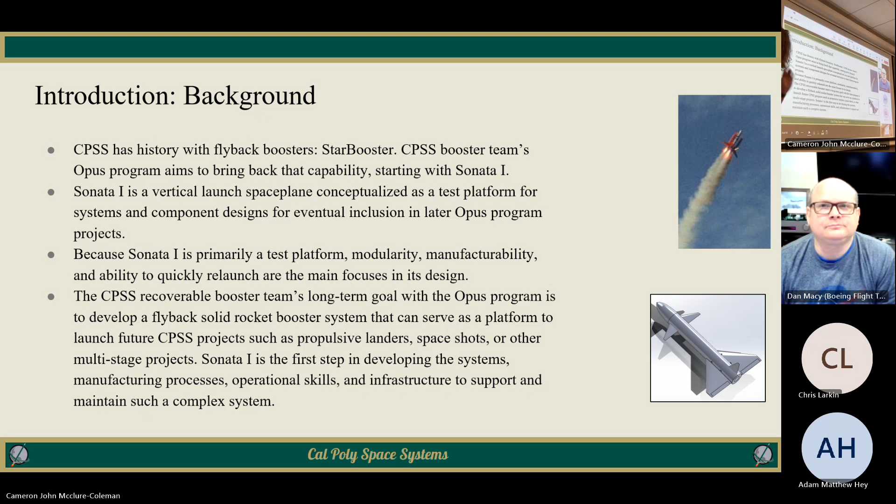Because it's primarily a test platform, we've been designing with modularity, manufacturability, and the ability to quickly relaunch and iterate as our main focuses. Our long-term goal is to develop a platform that could use flyback solid rocket boosters to get central stages up for projects like propulsive landers or space shots, or other multi-stage projects for CPSS in the future. So yeah, that's the background.

A little more detail on our rationale: we've decided to design to the constraints of having it be a small unmanned aircraft system, as well as the constraints of being a Class 1 amateur rocket. This reduces the headache of being reliant on organizations that run launch sites or other competitions like we do with our other rockets, and lets us independently manage and schedule launches as an organization ourselves.

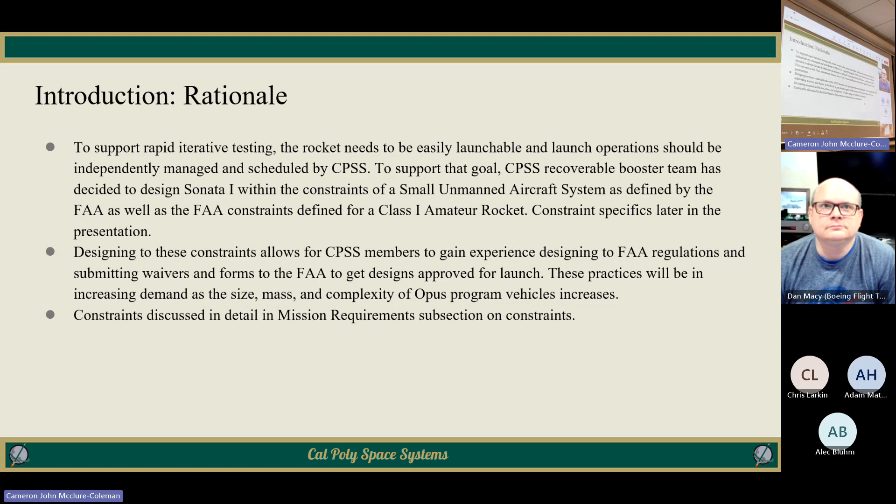Being a Class 1 amateur rocket, we'd still like to go through the proper channels and get waivers sent into the FAA, and have all the paperwork done that you need for a small unmanned aircraft system, because we'd like to practice that, and because safety is important. We'll need those skills for future bigger launches. I'll discuss the constraints further in the mission requirements subsection, but that's the overview of our rationale for how we're designing it.

Yeah, so mostly not too crazy stuff. We're also taking into consideration some other constraints we've been building with in mind. There are some severe airspace constraints we have to deal with launching in the San Luis Obispo area due to the airport.

And then also making sure that we're not launching somewhere where we could start a fire in a field with a lot of brush, and making sure there's nobody who could be in the way or in the range of operations, and that we have spaces for everybody who needs to be there to be safe and behind cover.

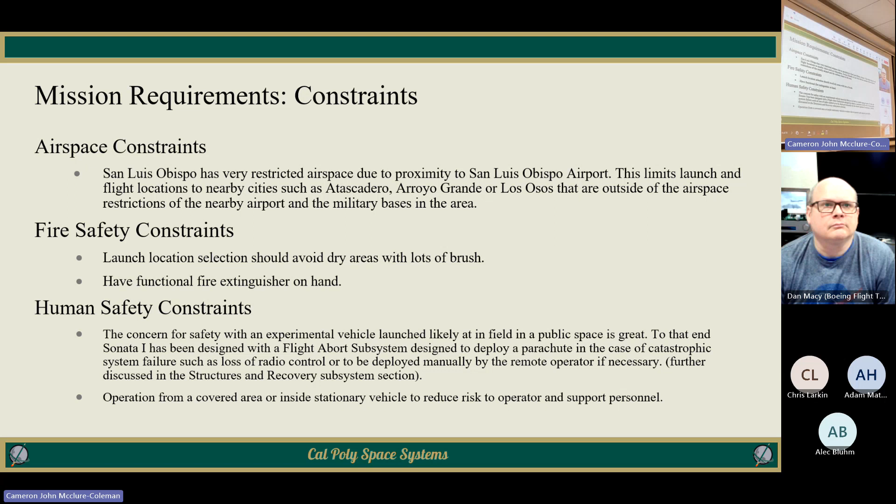All right, and then the mission objectives we've written up here, our main success criteria: we want to get up to an apogee over 250 feet and under 400, because that's what we're capped at for a drone unmanned aircraft system. We want a relatively straight up ascent, and then land after a successful glide phase. For the first flight, we don't want to deploy the FAS.

We're going to do other flights where we can test it. And then secondary objectives: gather data necessary to tune all the flight software parameters, and be able to rapidly test different designs for airfoils or whatnot. Gathering data on the performance of our physical components from the telemetry is important.

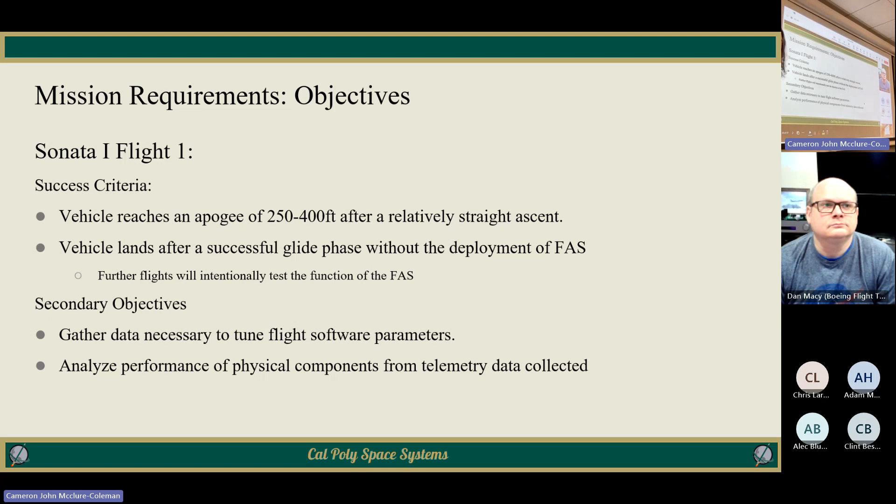And then moving on to vehicle overview. So this is just kind of our mock-up diagram here, and we'll go into further component detail later. But we're planning on building with large wings in the back, and then 2 canards with pitch control flaps.

This is very similar to how Starbooster was built. And we figured we'd just start with something that we know works, and then make it modular and rapidly relaunchable so we can iterate and test and tweak how we like it.

This is kind of how we're organizing the payload systems, with the motor in the back, and then the flight abort system that will deploy a parachute downward. We can talk about this further in the section on the flight abort system, but we decided to go this way because we figured it'd be pretty hard to fit it in a way that could come out the back, which would probably be the easiest for the parachute deployment.

But for manufacturability, we figured a spring-loaded system deploying downward would be the easiest to do, and also the safest, because we're not sure how the motor will affect a parachute system while it's burning out and getting hot.

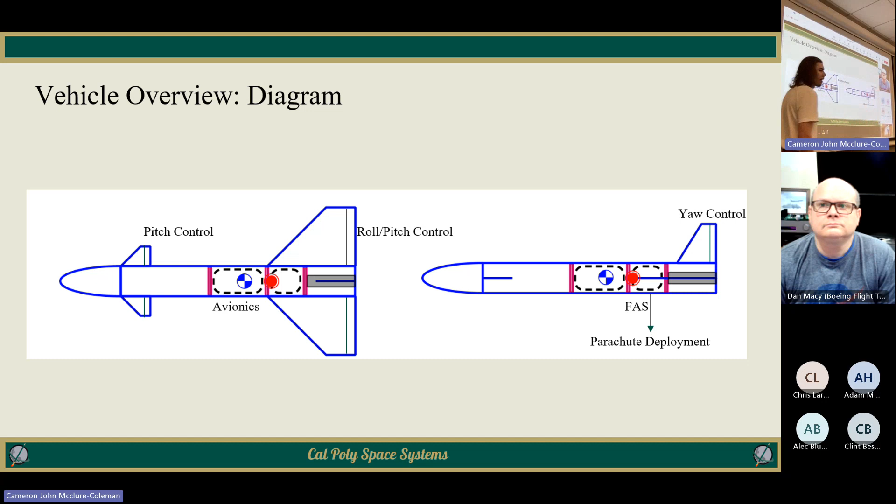Okay, and then just some quick overviews of the different modes of operation. While we're in ascent mode, we want the flight software configured to maintain a stable trajectory for us. Then after burnout, the vehicle will transition into the glide phase, where we'll have the remote operator take control of the control surfaces.

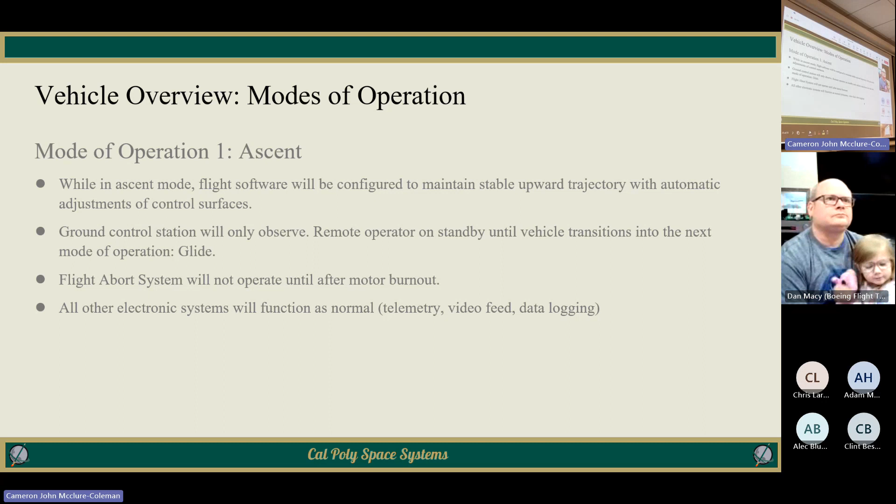The flight abort system, we don't want that to trigger while we're under motor power, so that will be switched into an off state on ascent. And then all other electronic systems will function normally: telemetry, data logging, video feed, etc.

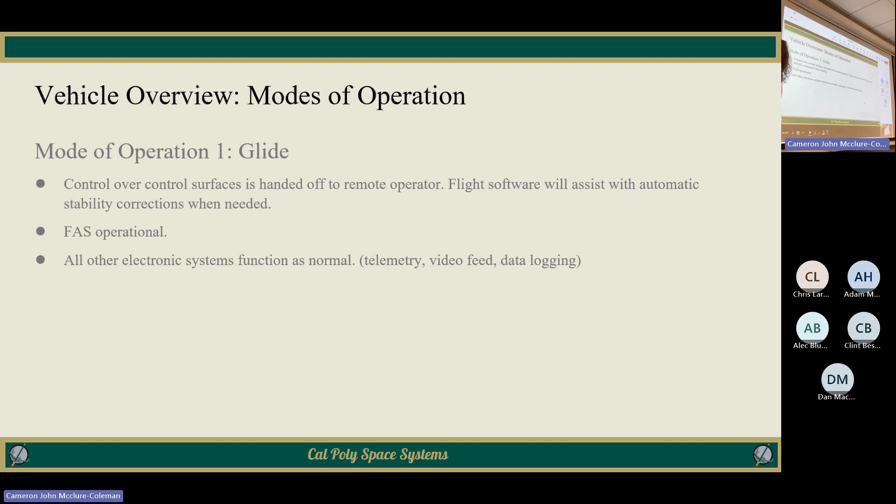And then in the second mode of operation, after we transition, control will be handed over to the remote operator, and the flight software will assist with stability corrections when needed. We'll have the FAS on standby, ready to go if we lose control or decide to manually abort, with all other electronic systems functioning as they were.

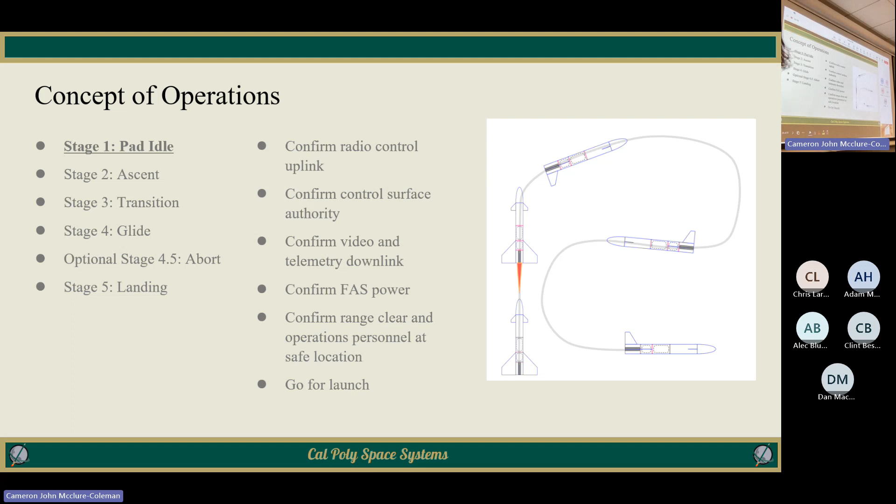So in the first stage, we're just on pad idle. We confirm all of the radio control uplink and downlink for telemetry, and then confirm that we have all the authority on our control surfaces that we want. Confirm we have power to FAS, confirm range is clear, operations personnel at safe location, and then go for launch. And then we can do launch and ascent phase.

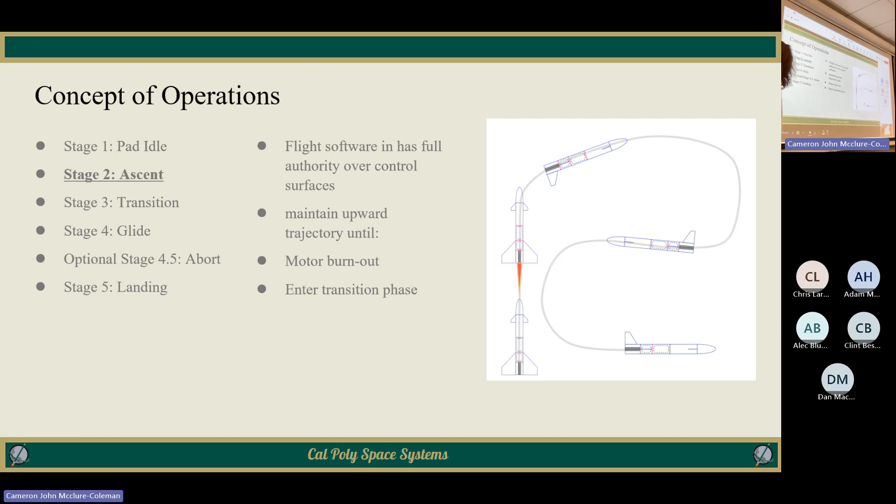Flight software has full control and authority over control surfaces. We maintain upward trajectory until motor burnout, and then at that point we go into the transition phase.

So we'll now be under remote operator control. Flight software provides stability support, and then we perform the peel and roll maneuver, peeling back, rolling over, and enter the glide phase.

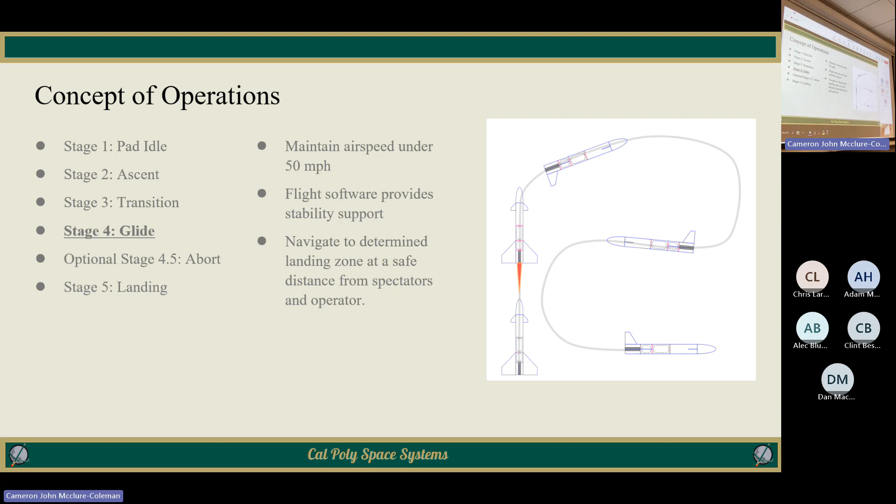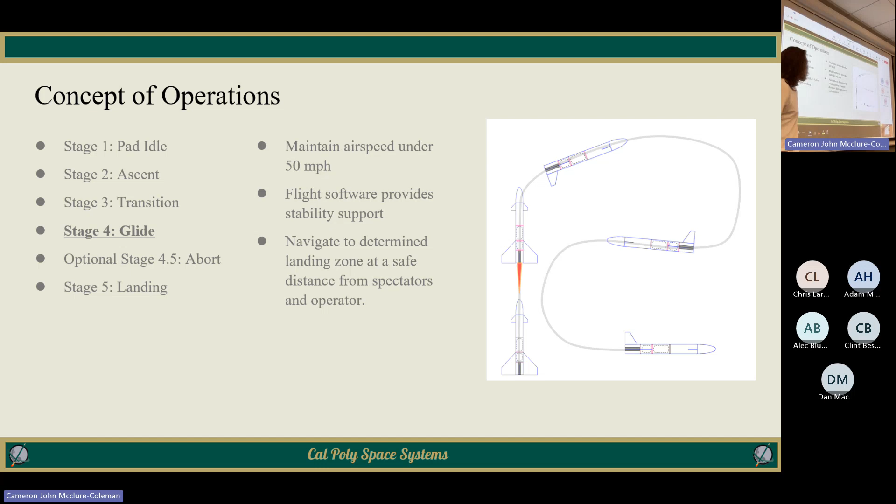During the glide phase, the main goal is to just keep it in a controlled glide, somewhat slow, not going ballistic. Flight software is now providing stability support as before, and then we want to navigate safely to the landing zone that we have determined.

And then here, if the FAS deploys, we'll have a parachute, and it will slow the descent and make sure that it's on a predictable descent and not just kind of gliding out of our control into a tree or into a person. And then if the FAS deploys, we want the control surfaces to stop operating, so there's no chance that they get damaged or they damage the parachute.

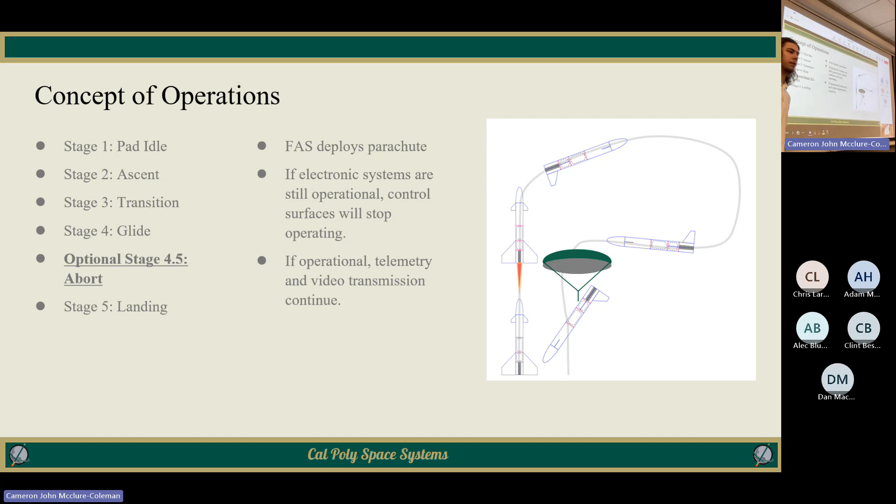And then if the telemetry and video transmission are operational, we'll continue just so that we have data from the GPS as to where the vehicle is, so we can go find it if it's too far. And then landing, power down, recover.

Yay. All right, I think we have some questions. It's Chris and then Miles. Yes, let's do questions.

First, what Mach number do you guys expect to be at the end of boost phase or ascent phase? Like 0.1 Mach, I think at max. I think if I can pull up Open Rocket, it's in the slides later, but it was no more than 100 feet per second, and motor burnout happens like a second or two into flight, 2 seconds.

Copy. And then, your flight abort isn't really an abort so much as it's just deploy the parachute, right? You would not stop your ascent. Okay, copy.

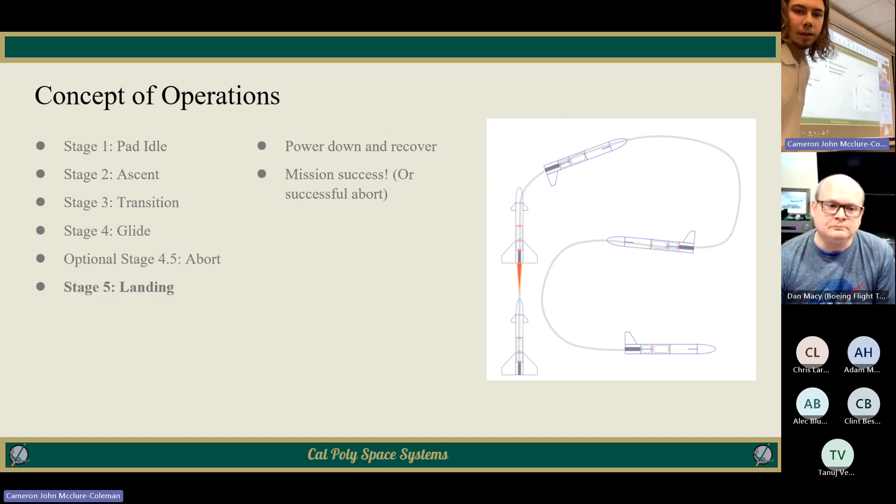Have you guys looked into ITAR requirements for active control? This looks pretty missile-y if I look at slide 12. I just want to make sure that you guys are appropriately accounting for that. Yeah, we've been reading through what the requirements are for fixed wing drones and stuff from the FAA. We read through that whole document, I think it's linked here. But ITAR is a good one to look at too.

I don't think we looked through that document on what classifies as a missile. We've just been going with what the FAA says you should do if you are flying a fixed wing drone, and are trying to design to those constraints. But yeah, ITAR is a good one to look into. We'll put that in our notes.

Yeah, I do not think that will fully cover you for fixed wing drones, since you are not under power from a propeller or anything. Oh, you think because it's under a rocket motor that... Sure, yeah. Okay, I think that might complicate things quite a bit.

Sure. I also wanted to reach out to them, they have a place on the website to reach out about questions about waivers and what forms we should sign. So I wanted to reach out to whoever the coordinator was for the local air traffic person from the FAA and make sure that we're doing it through the right channels. So that's somebody we can probably ask whether or not this classifies as an unmanned aircraft system or a missile.

Yeah, and then I guess if you are going to talk about this later, you can tell me to hold my horses. For the flight abort system, do you guys use a drogue chute? And have you guys considered using a mortar style, where you have a propulsive blast that shoots out the parachute instead of a spring-loaded mechanism?

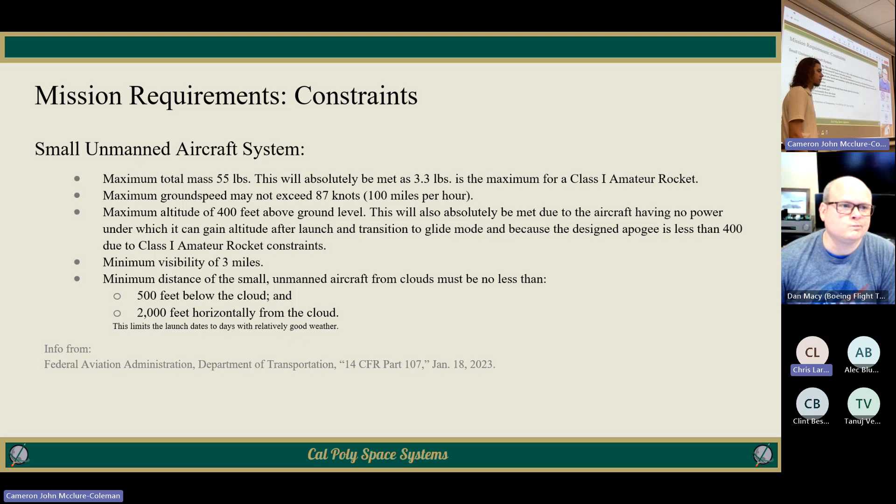What if your parachute deploy fails? Then you just limp mode the rest of the flight?

Sure, that's a fair concern. I guess we were thinking the main reason we'd be deploying the parachute would be that it automatically deployed because we have no power. But in the case that we still have power and the parachute gets cut, returning power to the control systems is probably essential.

You can add that to the notes.

Anybody else have questions before we move on to subsystems? I was wondering what your schedule looks like, not only for this project but scaling up in the future. Sure. We are looking to, in spring quarter, do first launch, and hopefully mid-spring quarter we'll have the option to do another launch day if we want.

And we're still in the process of selecting the best place, because there are a lot of variables there. Once we select where we want to launch, I think we'll have a better idea of when we can, and what the best target date looks like. Also, it's weather dependent as always with rocket launches and stuff. But we'll have more info on that for CDR, and hopefully have a specific schedule.

In terms of scaling up next year, we'd like to try launching a strap-on configuration with a dummy central stage, and that'll be our goal for the end of next year. Beyond that, scaling to whatever we need for any sort of projects will have to involve communication with other projects and where they are, and other payloads that are going to be developed, because I don't know if there's a specific one in mind yet for what we need to constrain to for developing a bigger version of Sonata 1. But that's like 3 years from now is the goal, I guess, so I'm not going to be here when that happens.

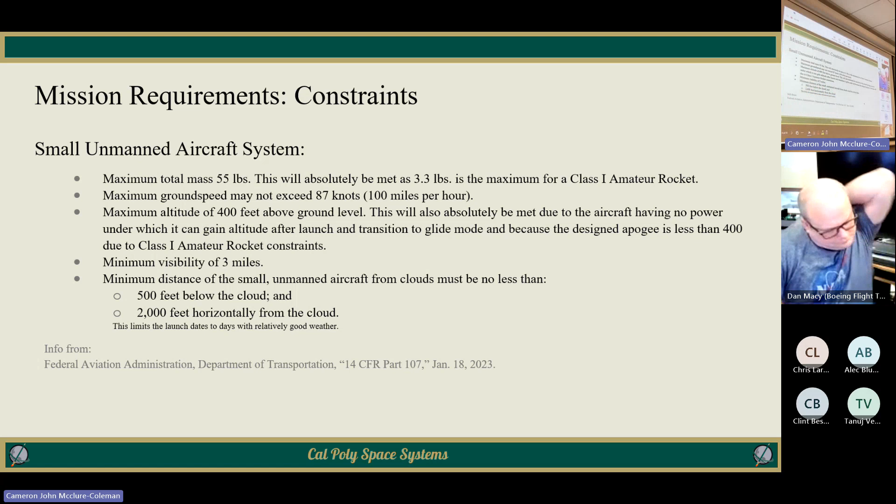You can also set that for power loss to the board, though you still have to have power from the battery. So there's also parameters you can set for a certain voltage threshold, so if you're low on voltage it'll pop the parachute before you fully run out of battery. There's a bunch of different contingencies you can set and have in place.

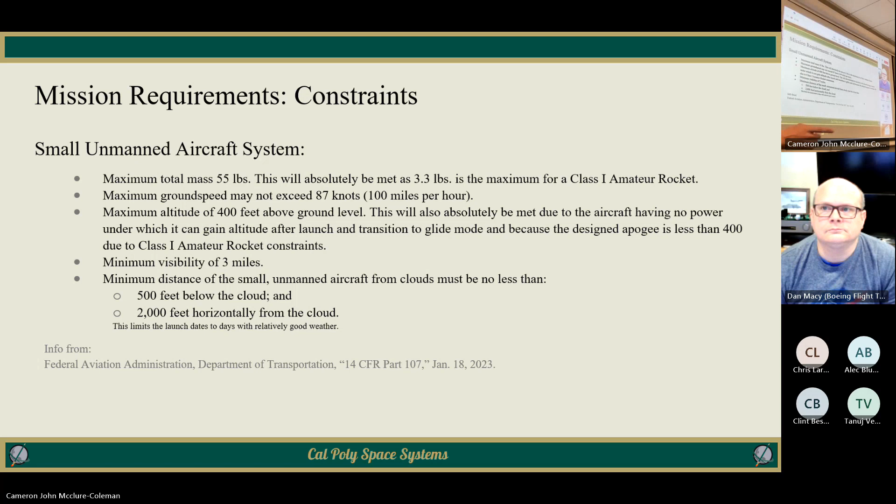Any other questions on the front half before we go to subsystems?

All right, we're good. Here's a quick agenda. We're going to go with lift and control surfaces first. I'll let Kyler take over for that.

Okay, hello, I'm Kyler. I did all the lift and control stuff. You just click next or... Yeah, you can do the arrow or space. Okay.

But basically, from what I could assume, I estimated the coefficient of lift to be between 0.15 and 0.3. This is just using estimated speed, because there's a video of it landing, and then the final report has a weight for it, and the rest can just be done using the lift equation.

So we basically decided to keep with a similar design as the old booster, using the same sort of delta wing with canard design. I guess Cameron already talked about this. And then we decided on symmetric airfoils, because that'd be the easiest for launch, so that there's no tendency for it to pull away when going straight up.

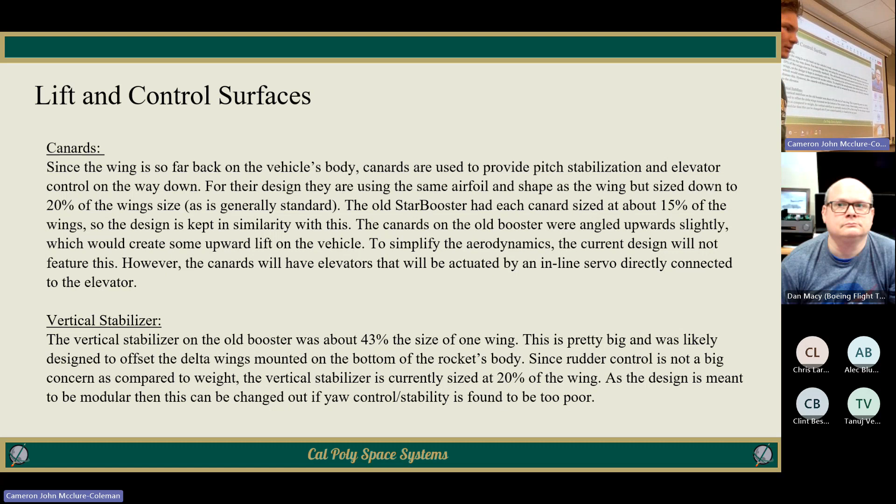And then I've already mentioned this, but the ailerons in the old Starbooster are about 12% of the size of the wing. And since we're making it pretty modular, we can test this and change them out. But for the start, I think we're just going to use the same ratios.

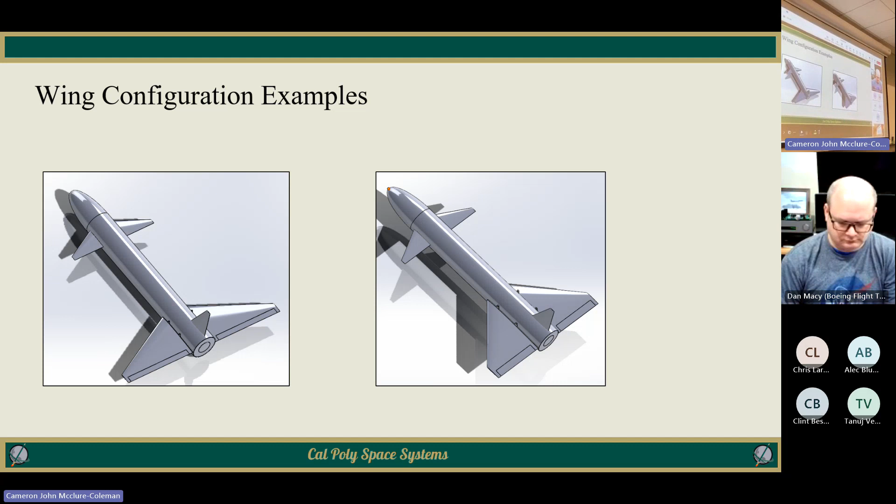And then we're going to control it with one of these low profile servos. We were going to put the servo in line with the control surfaces to make it simpler, but we decided that it would be better to have them placed up in the body and controlled down with a rod like most RC planes do. So that way we can switch out the wings a lot easier.

And then we also are going to test, ArduPilot has a built-in active control system, so during launch it can help stabilize itself, and we're also going to test that. We might not use that the whole time, but that is the plan.

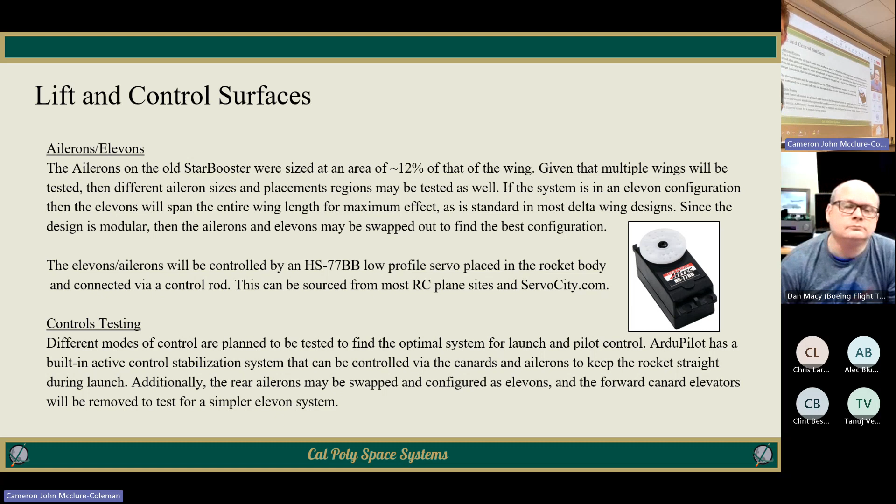And then for testing, the general goals are to determine the ideal airfoil and delta wing configuration for performance and optimal apogee. Again, testing control surface sizing and the system, so if we're going to use elevons only or elevators and ailerons, and then mixing it with the active control system.

Also for testing, make sure that the FAS works properly. That's supposed to be system, sorry. To assess that it works if we trigger it intentionally or if there's just a loss of control or power. And then we haven't gotten to this yet, but there is going to be a camera in the nose cone, and we're going to have the pilot control that with an FPV view. So we're going to test that and tune it to make sure it works properly.

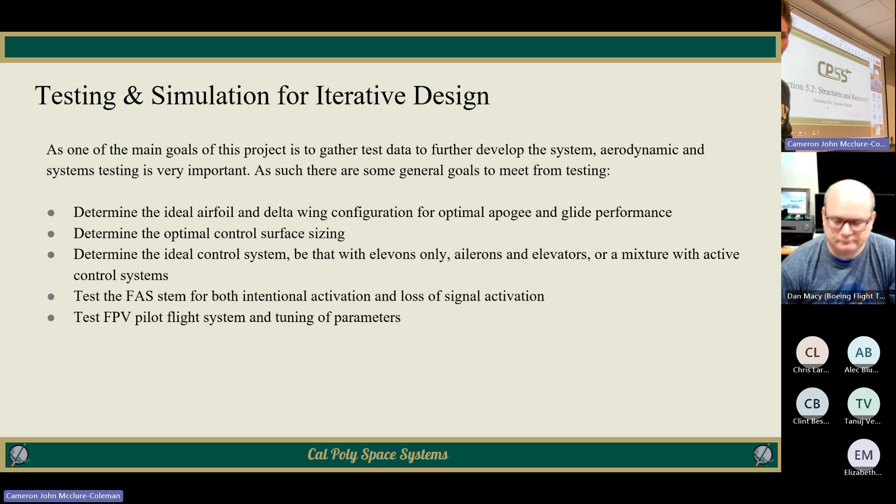I think that, yeah, that's the end of the lift slides. Any questions? Thank you. Okay. Any questions? On to the structures. Yeah, that's done.

All right, so my name's Spencer. I'll be doing structures and recovery systems. First off, just go over general dimensions of the rocket. For the main body tube, which is the main section, it's only going to be one section of body tube, 61.1 centimeters, which is roughly 23 inches. With a 3-inch inner diameter and just over that for our outer diameter.

We are going to be making it out of phenolic tubing, which is basically a cardboard tube that's resin impregnated. It'll hold up a lot better than traditional cardboard tubing will. It should have a compression strength around 5 times that of normal tubing. It's also heat resistant and only minimally more expensive than a traditional cardboard tube that you would use on smaller projects.

So we decided to use this because we have the motor inside the tube, and unlike a traditional rocket system where you might eject your motor, we are keeping it in. So the heat might become a factor that we're considering in the exhaust or in the back part of the rocket. So we just want to make sure that we're not burning up while we're gliding.

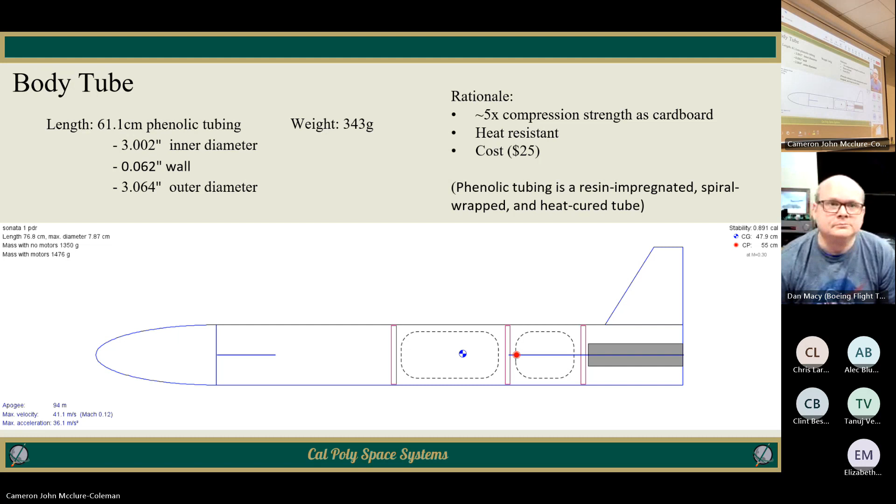Okay, so for our nose cone, we're looking at around 15.7 centimeters in length, again with a 3-inch diameter to connect to the body tube, and a 2.8-inch inner diameter, so a bit thicker. This is because we're going to be 3D printing the nose cone, and we want to make sure it holds up structurally. We're using an elliptical shape just for the ease of manufacturing, and since we're only moving at max like 0.1 Mach, we don't foresee that the shape of the nose cone will be a major contributor in air resistance.

So we're just keeping it as simple as we can so that we can manufacture it easily and relatively cheaply if we can do that on campus. But in order to be able to control and have the FPV, we are mounting a forward front camera into the nose cone that'll sit underneath the tip. So it'll be pointing somewhat down to account for the slight pitch up while we're flying, so that you have a somewhat straight-on view if you're looking through the camera

during the glide phase. During the launch phase, it won't really be that big of a consideration because we won't really be able to control it, but we'd still like to see where it's going, so we want to have it active at all times. And we're going to run a wire from that camera back into the avionics bay to transmit the feed back down to the ground station, whoever's controlling the rocket.

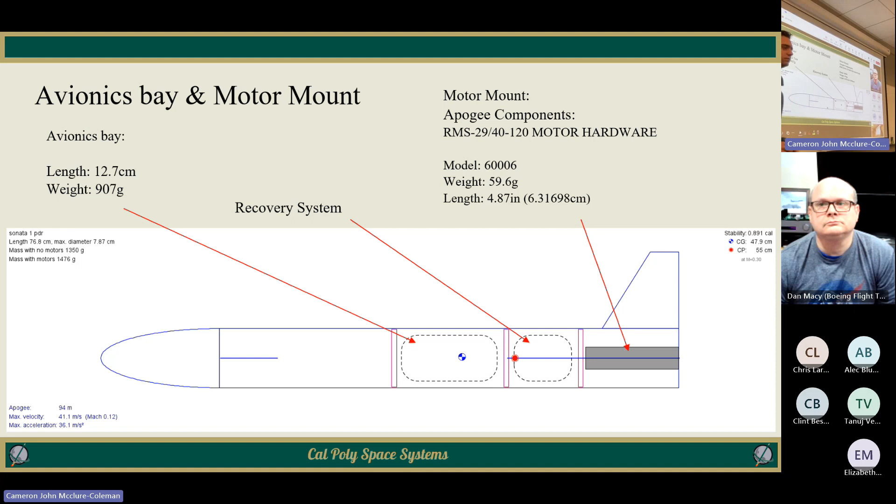Looking at the motor itself. The one we chose, we found online, has a burn time of 2.1 seconds, impulse of 80 newton seconds, and will be 124 millimeters or 12.4 centimeters long, with a mass of 126 grams, of which 37.9 grams is propellant mass itself.

As you can see on the right, we're going to have the motor slide into the motor mount at the back, with 2 centering rings to keep it in the center of our rocket.

We hope that we can just slide it in and it fits really nicely. It should, because the mount and the motor itself are from the same company, so it should fit. But we might have to play around with that a little bit to see some tolerance on the mount itself to fit the rocket.

As we mentioned earlier, we're planning on keeping the motor inside the vehicle during the whole duration of the flight, so there's no secondary charge that would release it or anything that applies after burnout. The only consideration now is the lost mass from the propellant that we have to account for during our glide phase.

What's holding the rings and the motor mount into the body tube? Is there anything holding it, or is it just the motor mount itself? Yeah, cool. The rings are just gonna be - the motor mount's gonna be in there permanently.

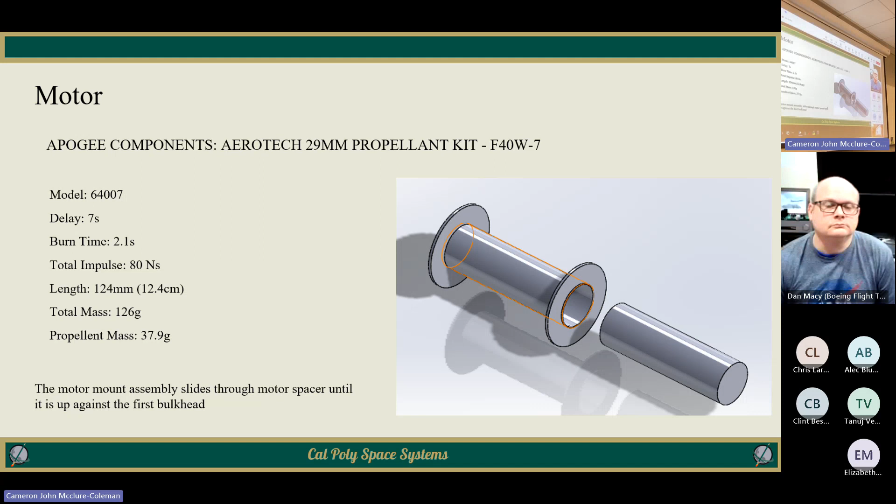All right, meantime, let's move on - so we'll go to control surface mounting. We believe we'll need upwards of 5 servos for all of the control surfaces. Due to the tight constraint of our diameter of only 3 inches, we foresee that it might become a problem that we can't actually fit the servos inside the tube itself.

We believe we should, but in case we can't, we're also considering having them stick out of the tube as needed, and then connecting to the control surfaces from there. So in the future, as we finalize our design and determine the strength of the servos fully for every configuration, we'll finalize where they're mounted and placed.

Generally, we'll just have servo mounts on the main tube itself. That'll be pretty permanent - we're not planning on moving the servos. The only thing that would change with a different wing configuration would be the arm controlling the control surface itself. The servo would remain in place, but that's stuff we'll design for when we're making the wings.

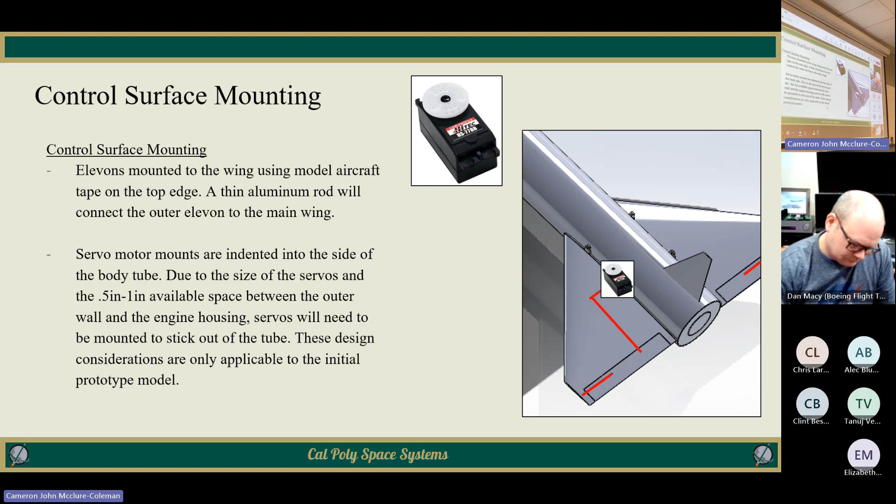We'll talk a little more about the mechanism itself. As we mentioned before, we're thinking of a small acrylic sheet that will glue onto the main wings. We'll have to make multiple of them depending on the wing, if we end up using slightly different airfoils or different length roots for the wings, but they should be pretty easy and simple to manufacture.

Each of them will have these little cutouts with bolt-shaped holes so that we can fasten it to the side of the rocket. We're designing it so that even if we change our wing shape, the fasteners are all exactly lined up in place for every configuration, so we wouldn't have to have multiple screws or extra holes into our main tube other than the 3 we'd need for any of the wings.

Something you guys might want to check is the minimum material at that bolt hole to the other side. When I was still in CPSS, we tried to control the rocket with canards, not realizing we had like 20 thou, and they just snapped off during install. So it wouldn't hurt to make sure you guys have a realistic amount of material there - maybe beef it up if you need to.

Okay, yeah, make the - oh okay, yeah.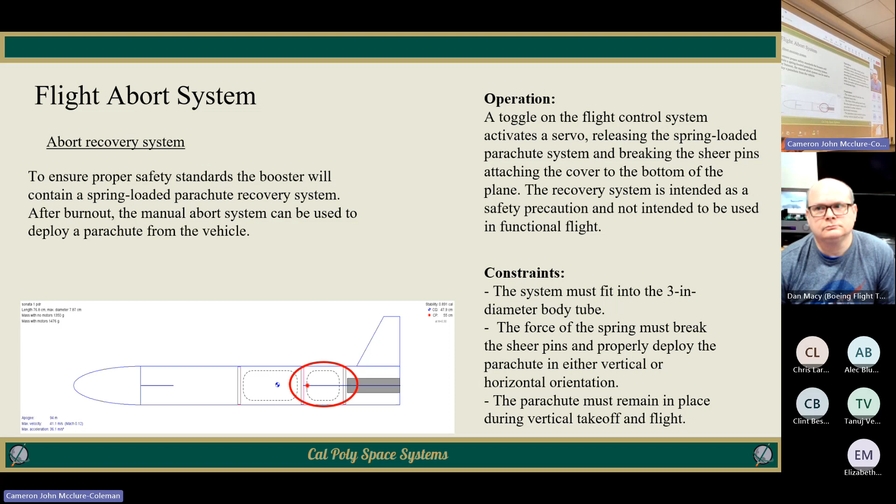Did you consider shock cord at all? Because that's going to contribute to your mass a lot. Yeah, we're kind of just basing it off of what we found, the one we determined we can't use. That one was 1 inch longer than the one we would, in theory, be using, but it was also made out of fairly high quality materials. So we're determining the parachute itself should be around the same, but the whole system might end up being a bit heavier or less, depending on what parts we can get, and if we can find something pre-built that we can just buy, which is still a consideration.

And here's kind of why we decided to use springs instead of carbon dioxide pressurized systems. In the future, for our future designs, we're definitely looking at more pressurized systems for the recovery system, because we'll have a lot more space to play with inside the rocket. But for our preliminary design and the prototype, we're really restrained by the amount of space out the back of the rocket. So we're trying to improvise a somewhat usable system that'll work for the prototype, and that will be able to change later next year when we scale up the rocket itself.

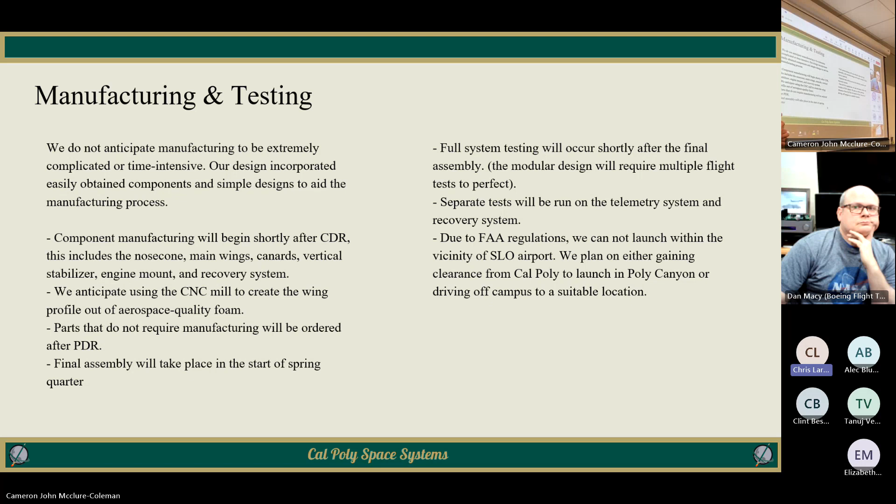So I'll go back to that. It doesn't have to be a pin. We're kind of looking at some system that will break away so that we can have a full body tube during flight. But if need be, we can release the parachute through the tube, through a hole, when the system is activated. So we're not really set on how we're going to do that, that's kind of the first thought, but we'll definitely consider more options as we go down and look at fully manufacturing it.

Okay, cool, thanks. We need to do calculations to make sure they don't break in flight before they're supposed to break. That's one problem with the shear pins, since we have a vertical takeoff, the forces are going to be a lot higher than when it's actually deploying, so we need to account for a lot more force than we normally might.

Are you planning on just using a Dremel or a box cutter to cut that thing out? Yeah, okay. And the nose cone, how is that attached? Is it just squeezed in? Squeezed in, or some sort of coupler that will go over it. The 3D printing should give us a good range, and we can remake it if we need.

Yeah, that makes sense. And last, the foam, how much is that? It seems like you need a lot of foam because you're testing a lot of different airflows. How much is that going to cost? Probably, because they're pretty thin wings, so we figured we could just get sheets instead of big boxes of foam, so it should be cheaper. But also, once we have our test matrix for how many wings we want to test, we can be more specific on the total cost.

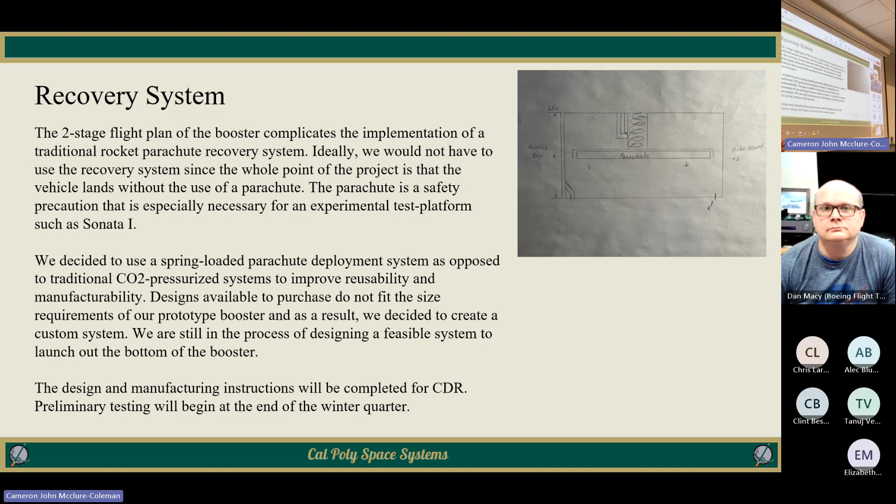I had a quick question about the mounting plates you're using for the wings. So you said you're going to do those out of acrylic. Do you know what type of acrylic? Are you talking plexiglass or something more bendable?

Something hopefully slightly flexible. If it won't flex to the form of the body, we can just keep bending it. I would only say, if you're using a plexiglass type material, my only words of advice is if you plan to use heat to heat them up, be really aware that you will have heat affected zones where your mount attaches, and acrylic is really brittle. I would try and find material that's more bendable and try to avoid using acrylic because of the heat affected zones.

Do you have suggestions for a more heat moldable material? Not at the moment, but I could look into it. Thank you. Fiberglass plate, you can buy stock. Okay.

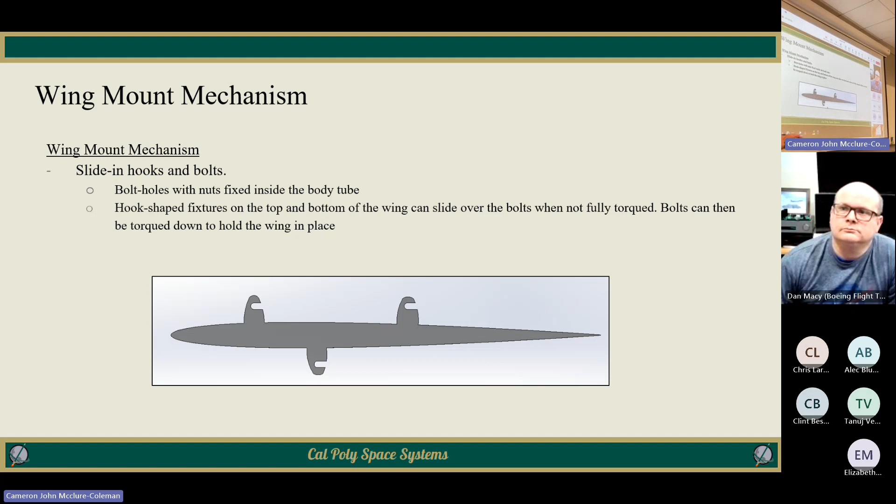So how are you going to see on the nose cone with the camera, if you go back to that slide? This doesn't have it, but the camera itself will have a mount inside the nose cone. Since we can 3D print it, we can design it with that in mind. Somewhere around, if this were the bottom, there would be a little cutout there which would stick out along the face, and the actual camera itself would be positioned towards the center of the nose cone. And you said that's going to be at the bottom because you want it to pitch down? It'll be at the bottom because when we're gliding, we anticipate it will be pitched up, so it'll look straight out the front when it's flying.

Why do you anticipate you're going to pitch up? Because according to your OpenRocket, the CG is in front. Well, just because when we're flying, since it's a symmetric airfoil, there's no lift on its own, so we're going to have to be manually pitching up the whole time in order to glide. Is that what you're asking?

Yeah. Okay, so with that, do you know what your stall speed is? Well, we have our glide speed target, but the stall speed, not exactly sure, less than that. And we also anticipate, the whole system, the main constraint was just landing.

So it's going to be a pretty quick descent. We'll be using that profile to land quickly, and especially right before landing, since we're going to be landing on basically skid plates on the bottom, or just the tube itself for this design, we're going to have to pitch it up as well to slow down that speed to get a smooth landing if we can. And when you fly, you're just going to aim for that target speed you said earlier? Yeah, because that'll all be manually controlled through the first person view camera.

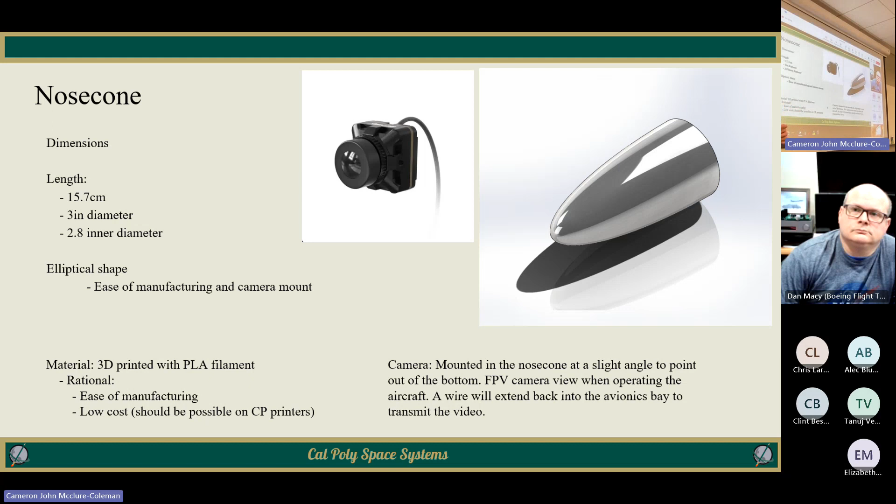Anyone else? Any questions? All right, should move on to avionics.

The room next door is now clapping.

Okay, moving on. I am now back for avionics radio control.

Just going to do a quick rundown of the components we've selected, then talk about software a little bit too. This is the flight controller we decided to use, getting it from SpeedyBee, built specifically for fixed wing remote control or radio control applications, because it's got a lot of nice pinouts and features that we can just add servos and other things to that we need to control.

It has enough for all of, I think, 7 total that we want to control, and then has dedicated pinouts for the cameras and telemetry transmission and stuff we need. Also, the same company manufactures a lot of components built to work with the board, so we don't have to worry about compatibility as much since it's already been tested with the board. It also has stuff for micro SD black box logging pre-set up, and plenty of pinouts for airspeed sensor and GPS.

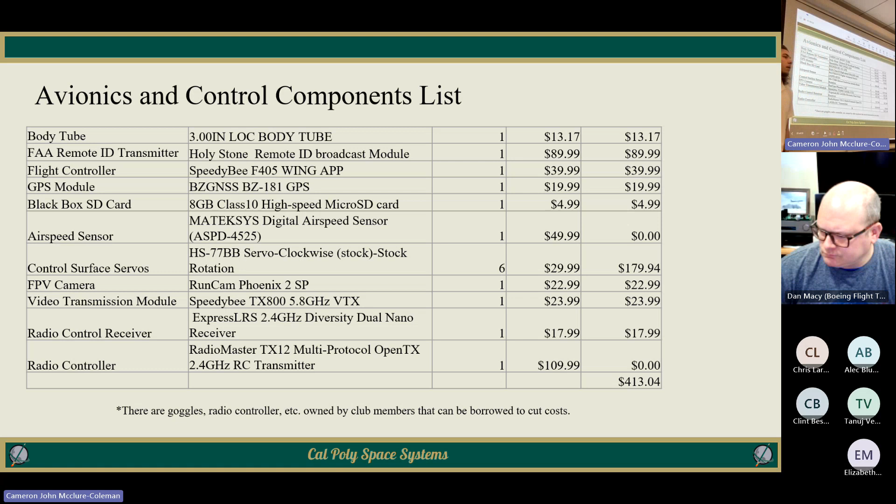Do you know what the budget looks like for the rest of the project? You mentioned you're under budget, how's that looking with all the components you've covered so far? Yeah, so I think the total budget was 700 to 800, about 780 I think is what it was. So we've got another like 250 or so to play with. I think that with the foam and the abort system, we might go over that.

So that's why I'm saying here that we might have to cut some of these down or pick cheaper options, or use ones that we own and just borrow them from club members for the mission. Because it seems like with your testing plan right now, if you guys have to use a new motor every time, that could be pretty costly. Sure, yeah, and that's part of why we're also going with a smaller motor, is that instead of buying like a $200 motor every time, it's only like the $20 to $50 price range, hopefully.

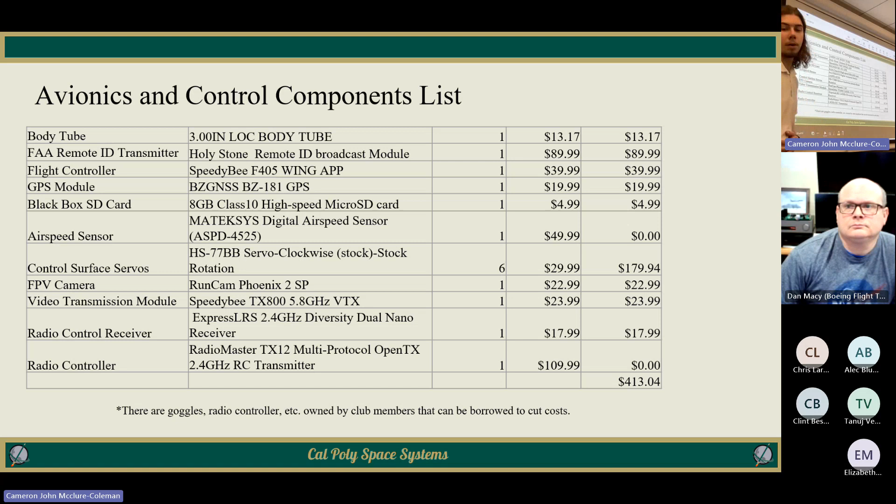And then along with that, the pilot, are they going to be equipped with the velocity? Is that going to be sent down? Yeah, so that's part of what the OpenTX is for, is that you have that display there. There's also software that you can use, depending on the goggles that you have. You can get it as a heads-up display in the goggles for airspeed and all of the telemetry, navigation numbers and stuff that you need.

And they're going to be able to see the live video also? Yeah, so you put goggles on the person, or you can have it go from the goggles to a screen, and that will have the live video with the telemetry display on top of it. Or if you have it on a screen, you can look at the navigation on this LCD if you're using that firmware on your controller. Right, thanks.

Hey, I don't really know a whole lot about RC plane control, but how does a digital airspeed sensor work? Yeah, so I can pull up the actual airspeed sensor that I have selected if you want to see, but it basically just has 4 pins. Where is it? 4 pins here: it has a power, ground, and then the two. Let me find the actual data sheet for it, and I can pull it up more.

But the one that we selected has a tube, like a pitot tube that you can just mount on a wing or wherever you want, and then that tube comes out to that digital board there that just runs the sensor on whatever the pressure is in the tube. And so we would have to make sure that we design so that we're not kinking our tube and affecting the air pressure.

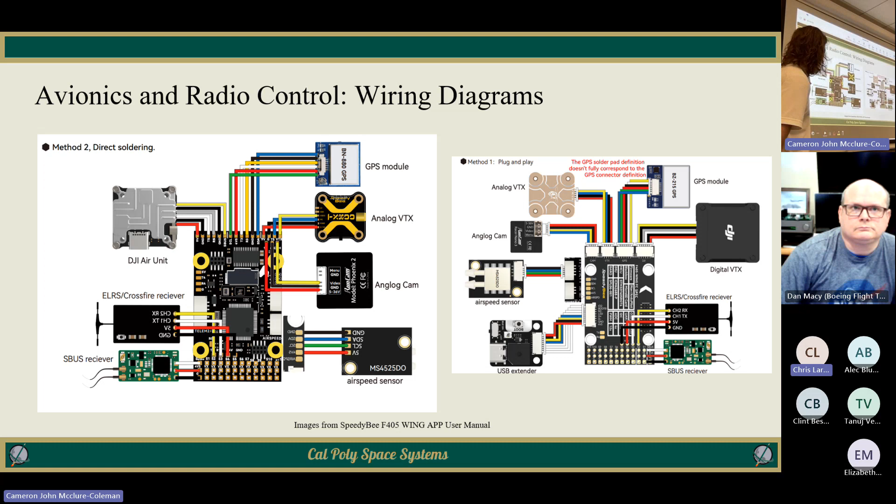I know you said you don't have much of a manufacturing plan, but CNC milling, or how thin are those wings? Yeah, so that is a concern, the thinness of the wings with the CNC milling. We might realize that it's too thin to CNC mill and then have to choose a thicker airfoil or scale it up somehow. We were thinking about also, like some RC planes, printing out the spars for sections and making it over them. That's just difficult because it's hard to keep the airflow constant.

Another manufacturing option we looked at, if we have to scrap the CNC milling idea because it's too thin, is you can print out a spar on either end or use a plywood kind of guide and then use a hot wire foam cutter. And I've seen that that's pretty popular for RC plane foam cutting. We just figured that because it's not a flat rectangular wing, it would be harder to do that, and CNC milling would be easier for a delta configuration.

Right. CNC milling the first part should be fine. But since it's symmetrical, flipping it over, that's going to be hard to hold it if it's only held on. Depending on how thin it is, it might just snap. You're right, it's definitely a concern.

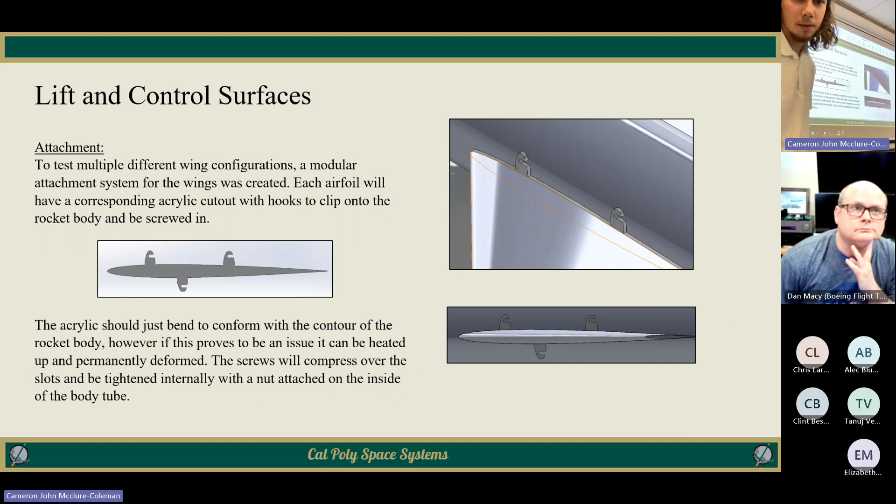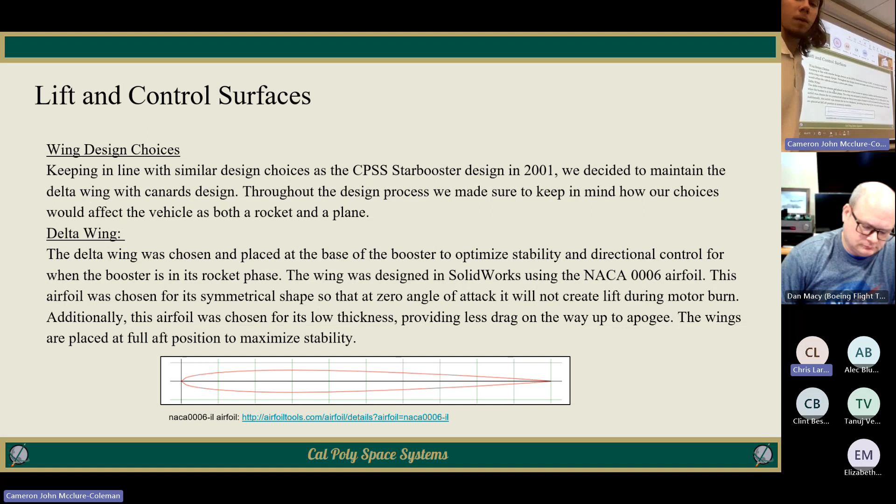All right. Anything else? I got one more question on your servos. Have you done any analysis on the relative torque authority of those against the torques you're expecting to see on your ailerons or elevons, whichever you go for?

Yeah, this is the slide on that. I think Kyler ran through it with the equation. I ended up doing the calculations for a couple different configurations, and just because of how small the wing is where the control surfaces are and how slow we're going, it doesn't really matter, because most of the servos that you can buy online are already well above the required torque.

Yeah, so he's saying that the servos that we selected were well above any kind of torque calculations that he was able to run through the equations for on all of the control surfaces, and so he doesn't foresee it being an issue. Okay, that's including your launch velocities, right? Yeah, he included the launch velocities. Okay, thanks.

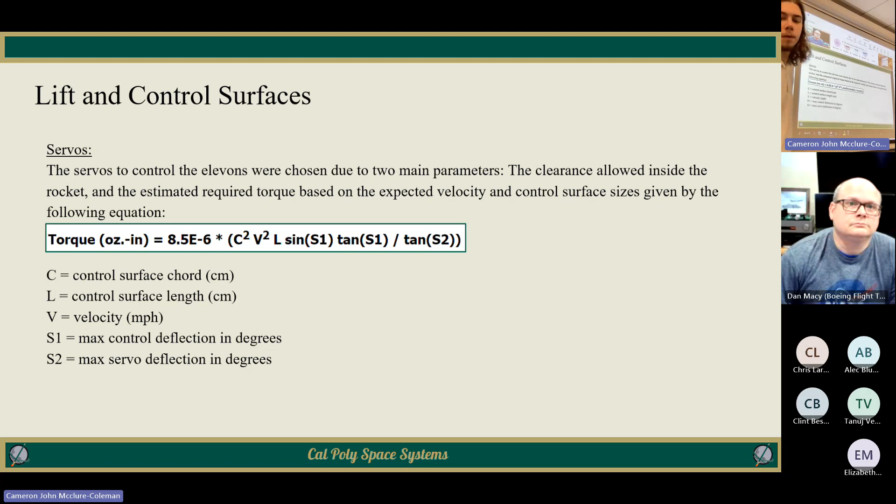All right, one more. So I noticed there's a decent amount of electronics and servos, but I didn't notice any mention of how you're going to power them, or how you know you're going to have enough power for all those systems. Yeah, so I forgot to mention in here, but this specific flight controller comes with a power board underneath there. That's the power distribution board, and then you would use a small drone battery that they sell as well

that are meant to fit that power board, and it's got all of the distribution pinouts that you would need to power if you had every single one of these pinouts on your control board. It has all that with it because it's built to function with it. And it comes with all the stack separators and standoffs and stuff too, which is nice.

What are some next steps that you're hoping to take for CDR? What do you want that to look like? Yeah, so hopefully for CDR we have a full CAD model done of how we're gonna put everything together. We want to have our test matrix done, and then full scheduling of selected launch location and dates.

And once we have our test suite, it'll be easier to know specifically, do we need to have 2 days to fit in the 6 tests that we want to do, or are we only doing 3 tests and we could likely do that in 1 day? And also because of how difficult manufacturing wings might be, I'm going to test that. Yeah, and then having a full testing schedule would be nice as well. And then hopefully mid spring quarter, we'll have that first launch.

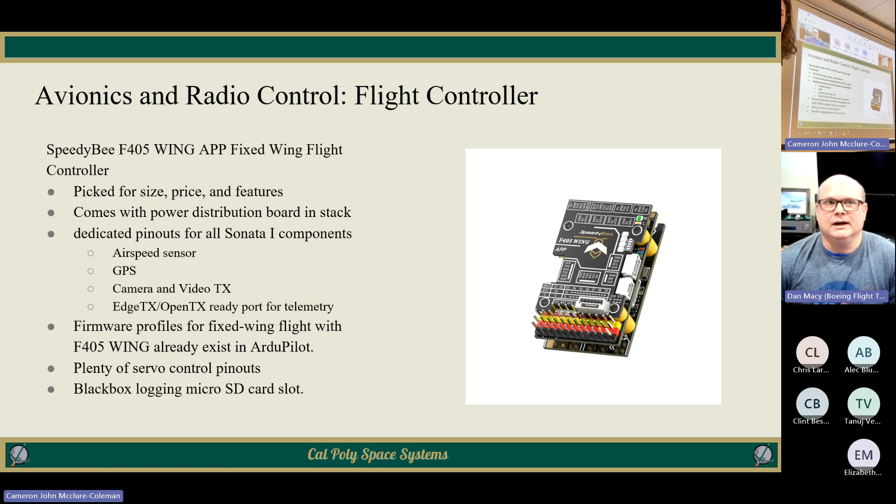The 3D printed nose cone: I'm really into 3D printing, and I think you might want to reconsider that and how you use it. It may be better for prototyping and tooling. It's kind of heavy. PLA, any of the materials you can 3D print for the structure you need, the strength to weight ratio isn't super high on those. So maybe consider another option there. Or maybe you make it really thin, like a vase mode, and put structure inside. Then your airfoil sections.

Consider beefing those up and making them a little thicker, or even going with a non-symmetric airfoil. This rocket you see in front of you was going pretty fast, and we defaulted to those symmetric airfoils, but boy, it also flies fast on the way back down. At the speeds and the weight you're talking, you could get away with potentially some thicker airfoils, or even non-symmetric.

And then lastly, for that parachute deploy, I heard Chris and the person sitting with him bring up concerns there. I just want to throw out the idea, there's probably a lot of other ways to deploy a parachute that aren't explosive in nature but are also simple. So maybe consider torsional type springs and hinged doors to throw a parachute. That's a perfect thing where you can build a number of 3D printed apparatuses, give it a try and see what you can do.